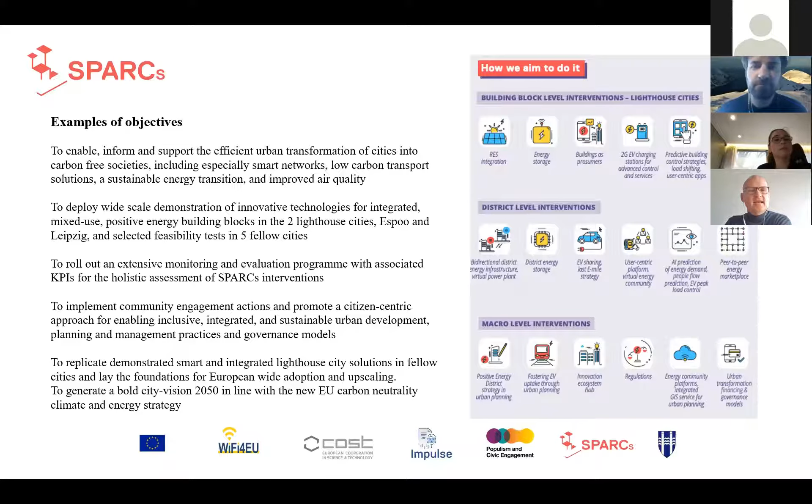As the project matures, we are in the second year now, and we will be looking at the uptake of different solutions that have been trialed in the two lighthouse cities. So it really is about the fellow cities scaling up some of these things and trialing them in different contexts.

The COST project is about synthesizing and improving existing knowledge from local, regional, national and international settings, and really understanding how we can better utilize and develop welfare technologies to assist those that need it, primarily to stay at home and enable them to access services more efficiently, and to be more self-sufficient. It's a very interesting project.

It's still in the early days. It started around 6 months ago, and we're very much looking forward to developing some grant applications on the back of this. As you probably know, these cost actions are about developing a consortium and partnerships, really to develop good ideas that can then be developed into grants and research and innovation.

Finally, our Impulse project, there we are looking at the application of and the challenges associated with AI and blockchains, and we are doing this in the context of developing new EID or authentication solutions. We are going to bolt this onto the Better Reykjavik platform, and the way we're going to do it is that we will develop it in such a way that it will enable disabled people to authenticate more easily onto our democracy platform, probably and primarily through face recognition technology.

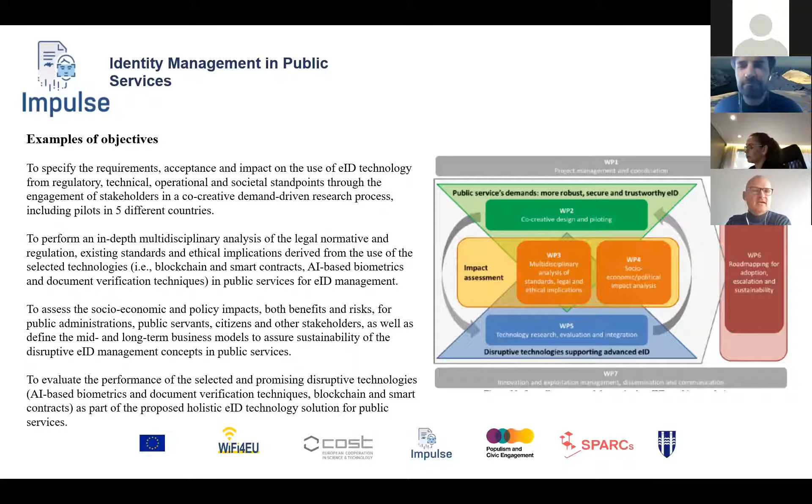And of course, because AI and blockchains are universal technologies, it's very hard to say how they will develop or what they will produce. It's very important that we understand better what the implementation of these technologies means for the public sector in terms of risks and other things as well. So we're looking forward to that. It's still very early days in this project.

Policy alignment is very important to us. When you come to us with a proposal for a project, it's important that we are able to align your project and what it will produce to what we want to see happening through our implementation in policy. And of course, the overarching agenda is Reykjavik's commitment to become climate neutral by 2040, and Reykjavik's new green plan as the catalyst for this.

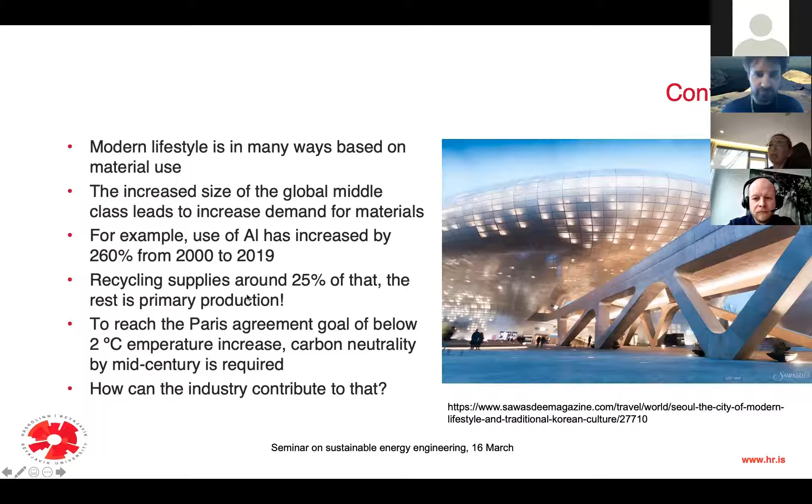And we know that if we are to reach the Paris Agreement goals of below 2 degrees or even 1.5 degree temperature increase, carbon neutrality by mid-century is required. And how can the industry contribute to that?

If we look at the sources of greenhouse gas emissions globally, energy, as in electricity, heat, and transport, is around 50%. Shifting to green energy such as renewables has been a big focus of research efforts pushing towards decarbonizing energy production.

Then we have agriculture, buildings, and a contribution of more than 20% directly from industrial processes, such as steel production and cement production, but also aluminium production and fertilizer production. Here we are talking about direct emissions. The energy needed to run these processes is not included in this slice of the cake, which is 21%. It's included in the blue cake instead.

People are working on this, but there are still not many solutions that have reached industrial scale to reduce those industry emissions.

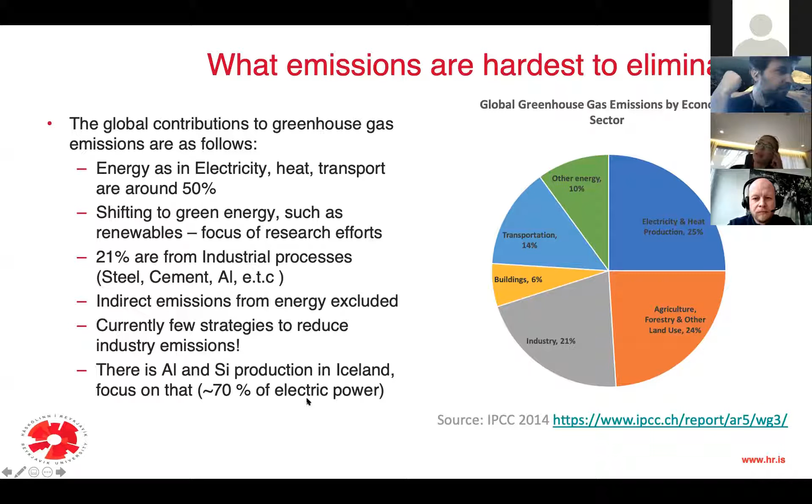In our work, we have been focusing on aluminium and silicon production because those processes are operated in Iceland, and they actually consume about 70% of the electric power produced in the country today.

Metals, as we know, are always oxidized in nature. We cannot find them in metallic form. The only exception would be maybe gold and iron from meteor cores, but in general you will not find them in the metallic shape. They are oxides, sometimes sulfides, and we need to remove the element bound to the metallic atom in order to get the metal we can use for different products.

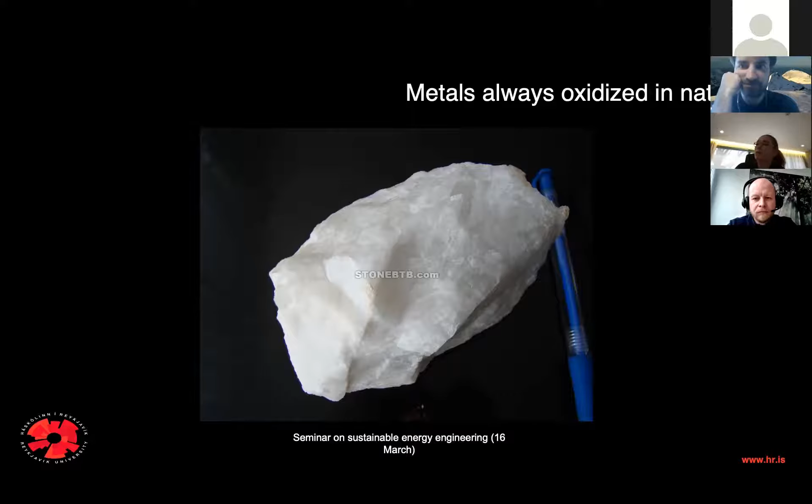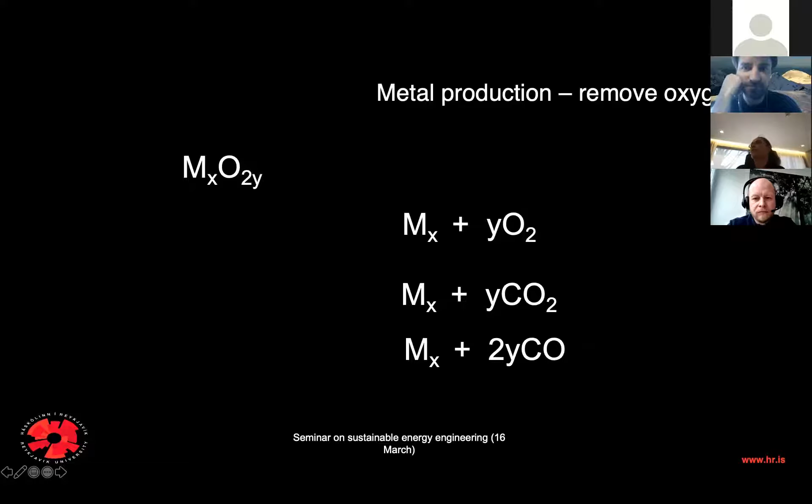So we find the metallic oxide as an ore, typically, and we need to separate the oxygen from the metal. Ideally we could separate it in the form of oxygen, but in reality we often have to go through a process that releases the oxygen in the form of CO2 or carbon monoxide, due to the nature of the chemical processes used.

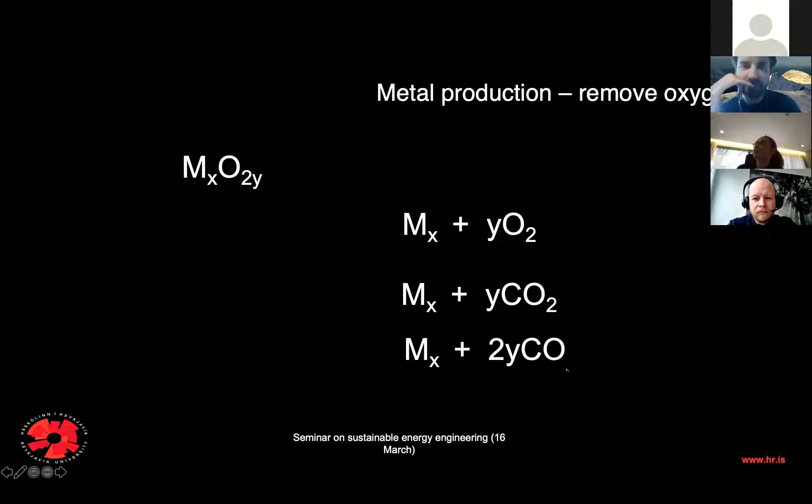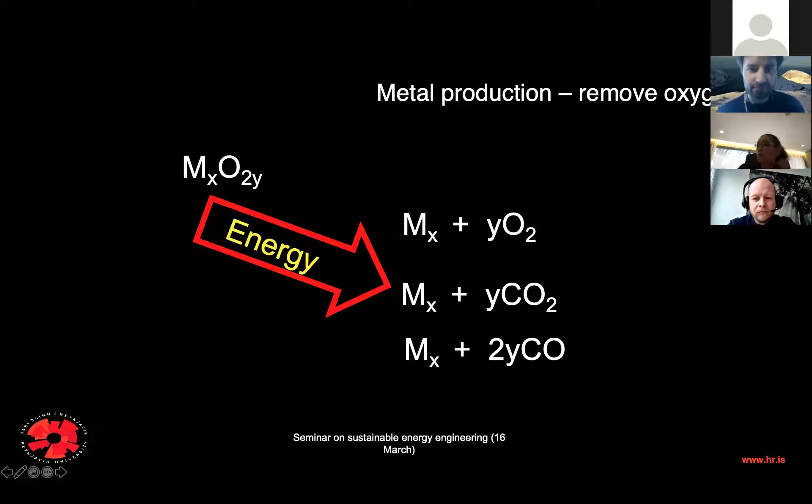In addition, we need a lot of energy because being an oxide is a much lower energy state for the metallic atom to be in. So we need to add this energy, often in the form of electricity, and then remove the oxygen, which often occurs in the form of CO2. Then we have the metal we can use for different things.

Aluminium electrolysis occurs in big electrolysis cells. You have the raw material in the form of Al2O3, aluminium oxide, and anodes sticking into the electrolysis cell. You pass DC current through, the aluminium is reduced to metal, which accumulates at the bottom of the cell, and the oxygen combines with the carbon anodes and is released as CO2.

One of the solutions we and other people are working on is replacing these carbon anodes with inert anodes so that we could release oxygen rather than CO2.

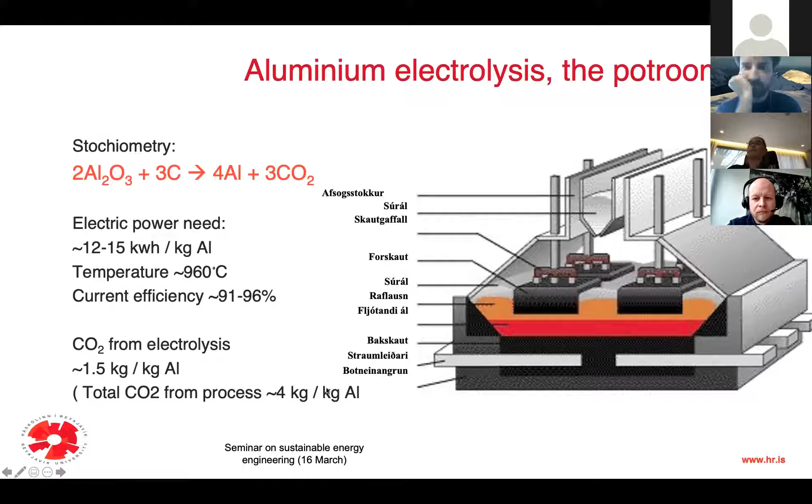CO2 emissions from the electrolysis process itself are around 1.5 kilograms of CO2 per kilogram of aluminium, but in total from the process it's around 4 kilograms of CO2 per kilogram of aluminium when we include production of the alumina raw materials and the anodes. And then, of course, we have casting and transport also to take into account.

But as a matter of fact, since we are using so much electric energy in this electrolysis process, the indirect emissions from producing that electric power are the biggest contributor to the carbon footprint. So if we are producing aluminium with hydropower, for example, the total emissions would be around 4 kilograms of CO2, including all the different processes leading up to the electrolysis step.

If it's produced with natural gas, the footprint is close to 12 kilograms of CO2 per kilogram of aluminium. But if we are using coal thermal power, we are at around 18, even up to 20 kilograms of CO2 per kilogram of aluminium. So basically, it's the energy component that dominates if we don't have renewable power.

We see that production has more than doubled since the year 2000. Most of that increase in production has happened in China, where they are using 90% coal-based power for aluminium production.

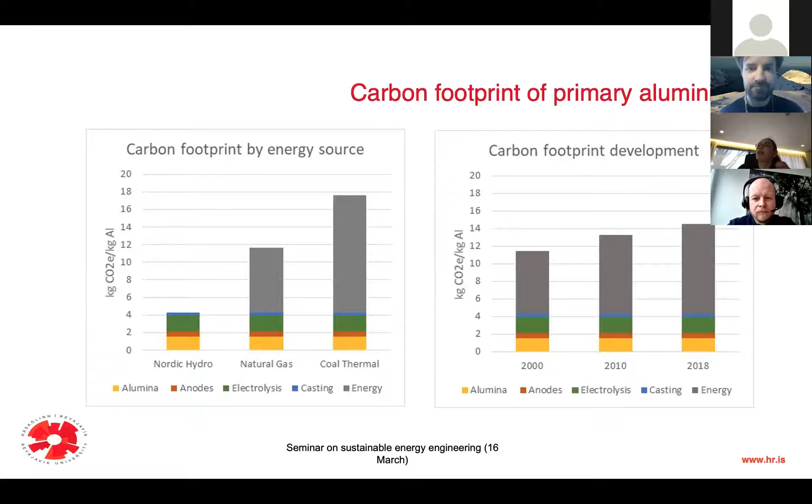We are producing so much aluminium here per capita that this is actually a big part of the CO2 emissions that occur in Iceland, even though it's part of the ETS system and isn't the direct responsibility of the Icelandic government. It is still something that we need to focus on.

So how can we reduce the emissions? To attack the electrolysis-related emissions, the alternatives are either capturing the CO2 from the flue gases that come from those cells and doing something with those emissions, for example pumping them into the ground using the CarbFix process to turn them into minerals, or we can go for inert anodes.

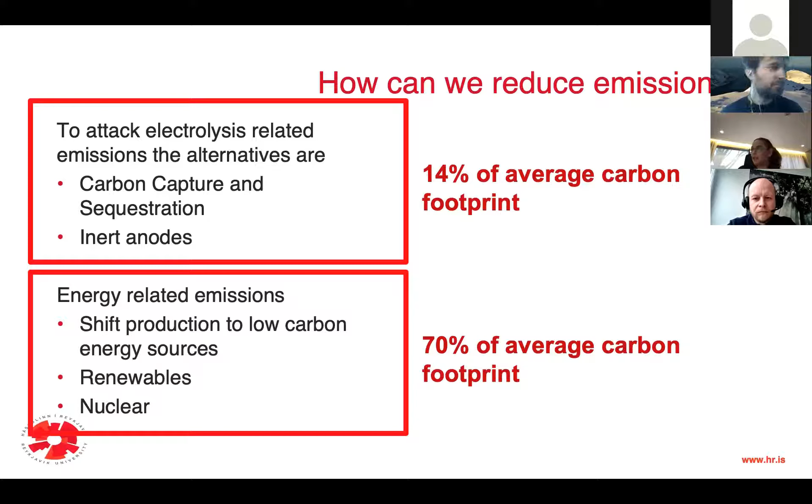Globally, the most important part is to shift production to low carbon energy resources. Now this is only 14% of the average carbon footprint, and this is 70% of the average carbon footprint. But still, this is what happens within our boundaries, within our borders, where we have some control over the emissions. So it makes sense to do research in that field in Iceland.

If you look at silicon production, it is not an electrochemical process. It's not electrolysis, it's a carbothermic process. Basically you put the raw materials, which is quartz or silicon dioxide and carbon, into the furnace, and then you heat up the insides of the furnace with electric current, partly through an electric arc, heat it up to 2000 degrees centigrade. This is the minimum here in the lower parts of the furnace.

We need to get silicon metal out of the furnace. The CO2 emissions from this production is around 4.7 kilograms of CO2 per kilogram of silicon, mostly due to the stoichiometry here of the reactions that happen.

So basically, we increase the temperature high enough so that it is more energetically feasible for the oxygen to combine with carbon and leave the silicon behind to form a metallic phase. That's the definition of a carbothermic process. It just happens spontaneously at high enough temperature.

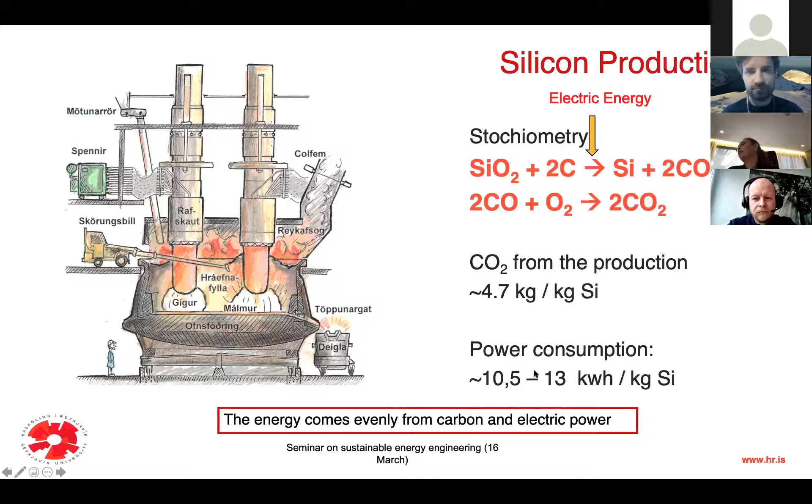And the power consumption here is a little bit lower than for aluminium, but still considerable. In the case of silicon, as in the case for aluminium, the production volume globally has increased by more than double since 2000. 240% is the production volume today as compared to the year 2000. And as in the case for aluminum, most of this has happened in China, the production increase has occurred there mostly.

As a result of this, the average carbon footprint of the silicon has been increasing, but not as dramatically as for aluminium. The reason is that a significant part of the silicon production in China is on hydropower, almost half of all the energy that goes into the silicon production process. And that is probably because the silicon smelters are smaller units, they can be paired with a reasonably sized hydropower plant.

And also, if you cannot run the hydropower plant always, and sometimes you need to cut power, the silicon smelter can live with that without damaging the equipment too much. But anyways, since the year 2000, the average carbon footprint from this process has increased around 1.5 ton CO2 per ton of silicon. So there, now about half of the total carbon footprint is the energy production.

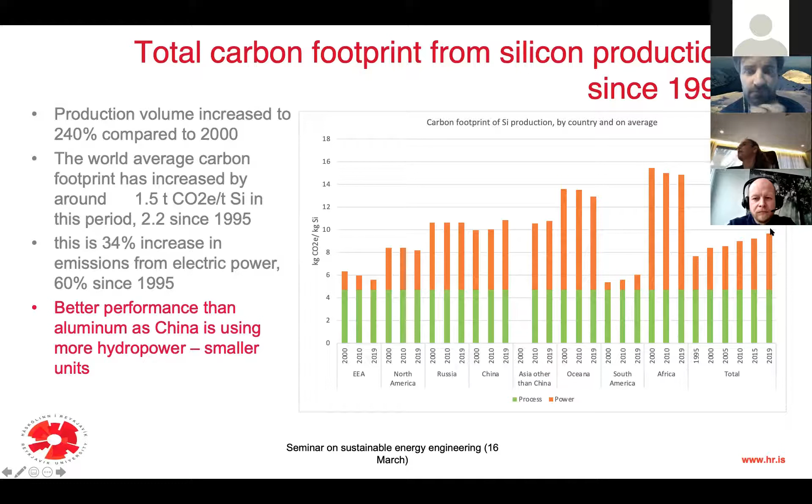So how can we reduce the emissions from silicon production? We can use biocarbon reductants, so replace coal with biocarbon, charcoal. We can use carbon capture and sequestration.

Actually, it is more feasible for silicon than for aluminium because the concentration of CO2 is larger in the flue gases, it's around 4%. So we can use off-the-shelf technology to actually up-concentrate CO2 for further processing. And then we can dramatically change the process, use methane as a reductant or maybe electrolysis.

And then we have the energy-related emissions. Currently, even though we have a significant amount of renewables used in the silicon production process, still half of the CO2 or the carbon footprint comes from the energy production. So shifting to low carbon energy sources is important, be they renewable or nuclear. So this is about the ratios in the carbon footprint.

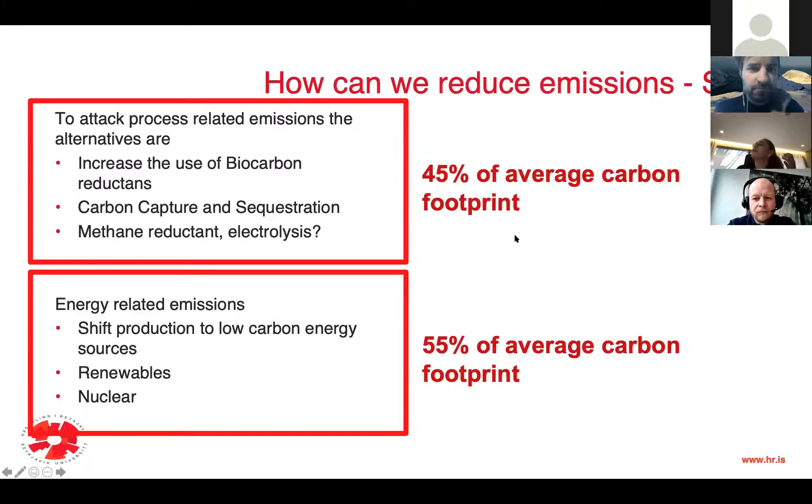Now, carbon capture and sequestration. I saw that at least Marta Rose was in the audience from Reykjavik Energy.

Reykjavik Energy, along with researchers from the University of Iceland, have developed a method to turn CO2 into minerals. They demonstrated this at a geothermal power plant by taking the non-condensable gases, CO2 and H2S, dissolving them in water, and pumping it down to a depth deep enough for the pressure to keep the gases dissolved. There they react with minerals in the basaltic rock underground and form carbonates, turning into rock. This is permanent sequestering of the CO2.

It's basically out of the way permanently, and very unlikely to get out of this form. I think most Icelanders are quite proud of this initiative. But this will not only work for CO2 from geothermal power plants, it's a great opportunity for industry.

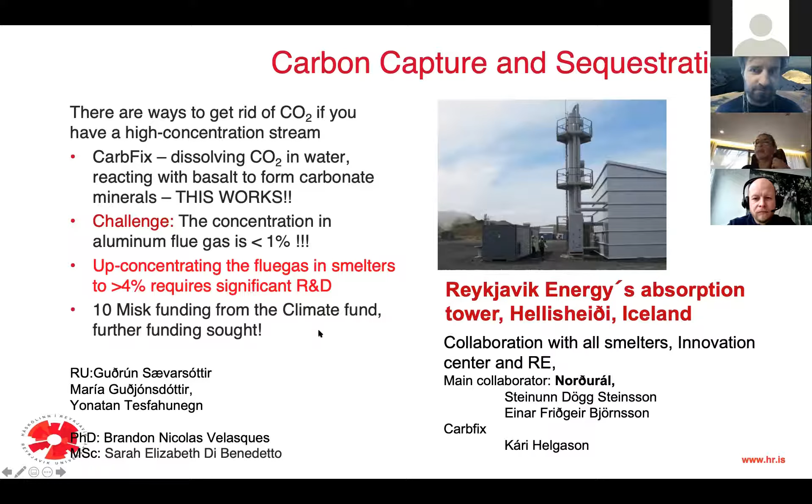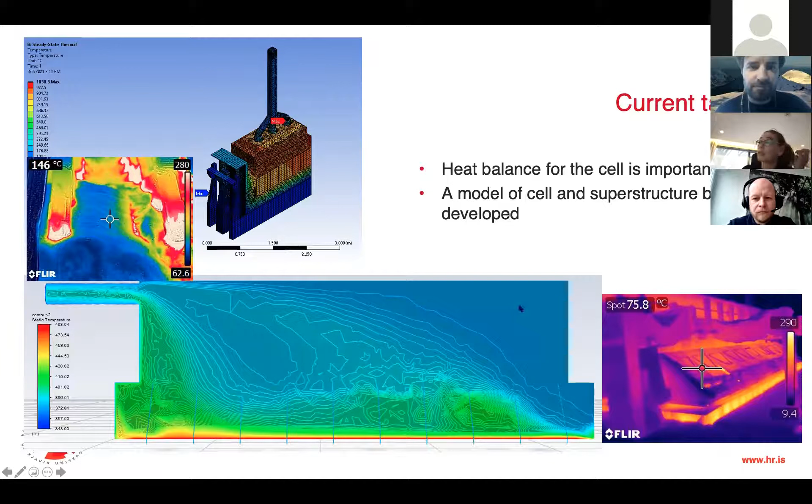We currently have a master's student and a PhD student working on thermal modeling of the cell and the superstructure, so that we can estimate which changes have to be made to the cell operation and superstructure design in order for it to cope with a reduced flow rate, by 75%, from the cell.

Then there is the initiative of inert anodes for aluminium production. There we replace the carbon anodes with inert anodes, so that we would be producing oxygen directly. This has been the holy grail of this industry for decades, or 100 years I would say, but has not been successful. Recently there has been a breakthrough with a modified electrolyte, which allows a lower temperature, reducing the chemical erosion of the electrolyte on the anodes.

Okay, sorry about that. That was my dog helping me with the presentation.

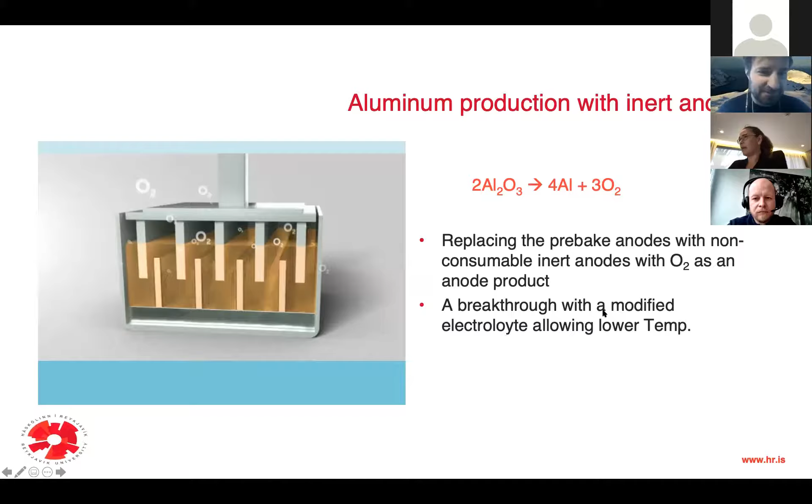So a modified electrolyte has made this seem more doable, and there are several development initiatives ongoing. The best known one is the ELYSIS process, where Rio Tinto, Alcoa, Apple, and the Canadian government are leading an initiative in Canada.

Rusal also has a project ongoing focusing on this, and we have an Icelandic project, the Arctus project, where the Innovation Center has been leading the R&D work, with Reykjavik University also participating, and students working on this. Now we have funding from the Alcoa Foundation and the Icelandic Research Fund, focusing on some fundamental mechanisms for this inert anode project. We have a postdoc and a PhD student working on this.

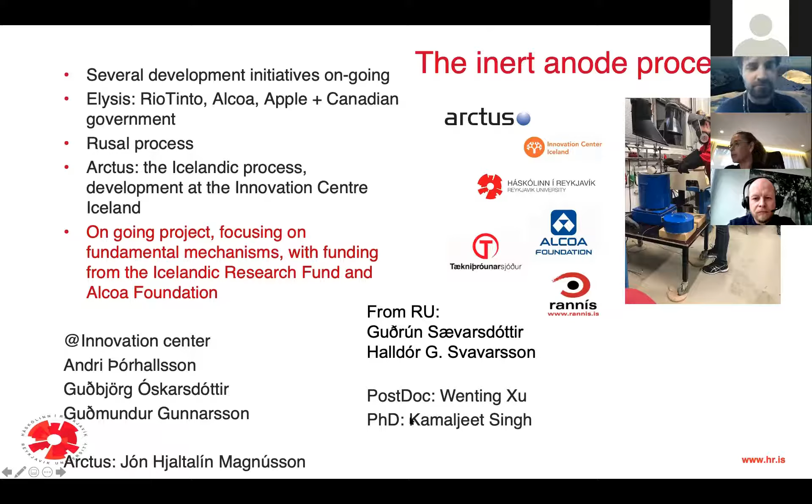So thank you for your attention, and if there are any questions I would be happy to answer. I could also have talked about geothermal energy, but that was for another time.

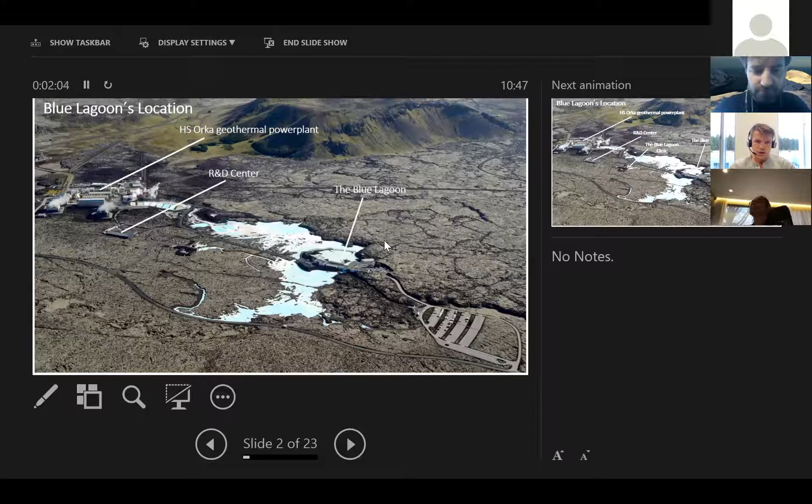The R&D center is very close to the power plant, and the Blue Lagoon itself, this spa, is in this circle here. Since recently, there have also been erected 5-star hotels close to this, and in addition there is this Blue Lagoon clinic where people can get treatment for psoriasis.

This is a schematic presentation of the origin of the water. The boreholes are about 2 kilometers long, and at that depth we have a temperature of about 240 degrees. The seawater percolating through the porous lava gets mixed with fresh meteoric water, and this gives a mixture of 70% seawater and 30% freshwater.

This is referred to as geothermal seawater, and it is actually used - the steam from this mixture is used for electrical production. The liquid remaining is used with a heat exchanger to produce hot water for district heating. So there are both thermal and electrical power.

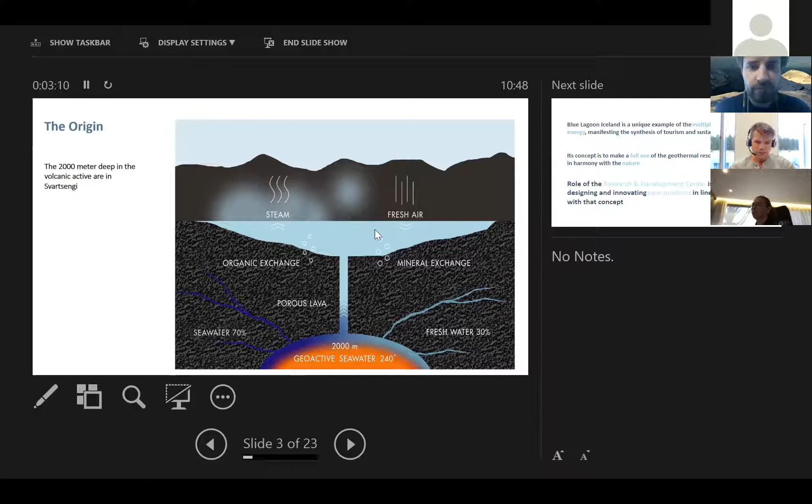Now the Blue Lagoon, due to its origin, has the concept of fully utilizing all the resources coming from this geothermal origin - make full use of geothermal resources in harmony with nature. That's the concept. And the R&D center has the role of finding new products and trying to get more and more full use of all the resources.

For the case of a historic region, the Blue Lagoon was selected 9 years ago by National Geographic as one of the 25 wonders of the world. And that is due to the nature of the water.

This healing power was discovered early in the history of the Blue Lagoon. People started bathing in this, and they found out that this mixture of silica and salt, and also later algae that was found in the environment, created a very healthy liquid for the skin. That was the origin of the Blue Lagoon. It was meant as a clinical treatment to start with, and that was roughly 20, closer to 30 years ago, I think.

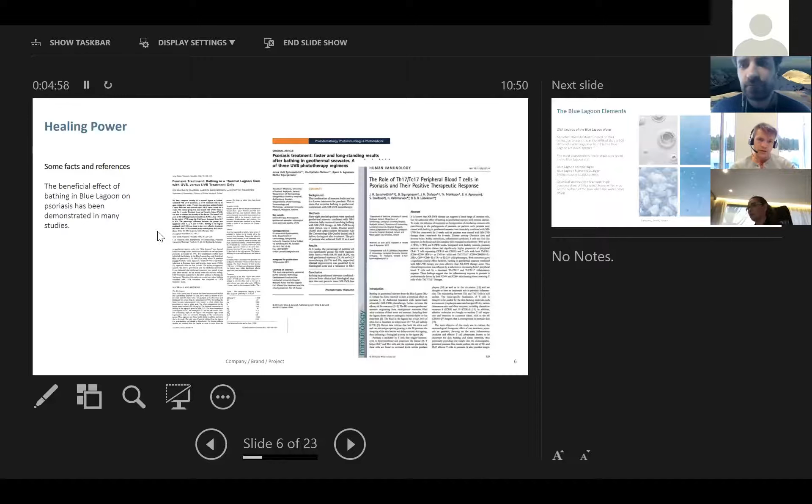The main elements that we are using in the Blue Lagoon is the silica that gets dissolved from the bedrock due to this high temperature, and then we have this salt, this mineral coming from the seawater. This is getting mixed with algae that thrives in the nature of the nearby lava. This all creates a unique mixture, and this has been the origin of a large skincare production of the Blue Lagoon.

It has been clinically proven and published in many papers that this has a beneficial effect for the skin, and it has also been patented. The use of this silica found in the lava and seawater, and also the use of the algae, has been patented. That was about 15 and 10 years ago.

This effect on skin has been proven in many clinical studies, and here we have examples of papers published on that. Actually, these clinical studies have not been in my area. I have been more focused on the silica itself and the algae and the chemical use of the algae.

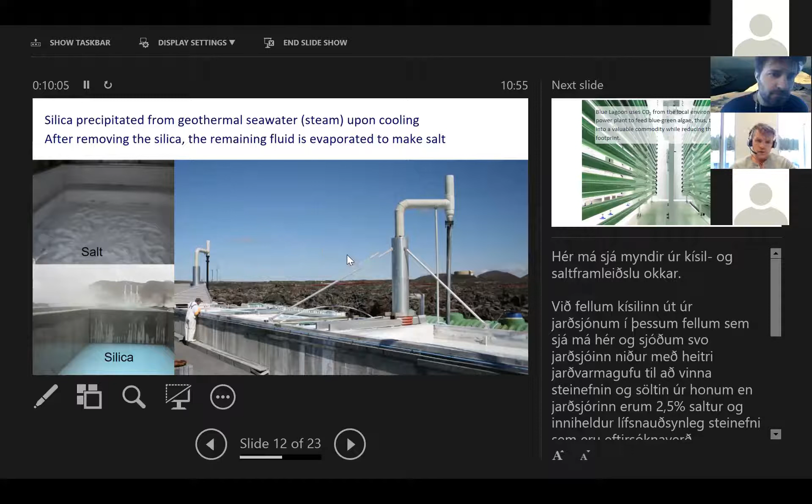Here we have a photograph of the photobioreactor. So we are pumping this saline water, this geothermal brine, and this algae—an organism that was isolated from the area of the Blue Lagoon, so it has adapted to this environment.

It is thermophilic, it needs about 40 degrees to grow, and we use artificial lighting, LED diodes, powered by green power from the geothermal power plant. This carbon dioxide emission is pumped into this photobioreactor, and that is more or less all we need.

We get some nitrogen and a little bit of phosphorus. Actually, we need more than this—we need to add some nitrogen and phosphorus nutrient, but we are working on extracting this nutrient from lava powder. That is one of the projects we are now working on.

I might mention that we have been developing methods to extract blue colorant from this algae. This algae is actually blue-green algae, so-called, meaning it contains both blue pigment, an organic protein, and chlorophyll, a green part. By using this geothermal silica, we can extract the powder from a ruptured cell, and this gives a beautiful blue color. We are hoping to use this blue colorant later on in some of the Blue Lagoon products.

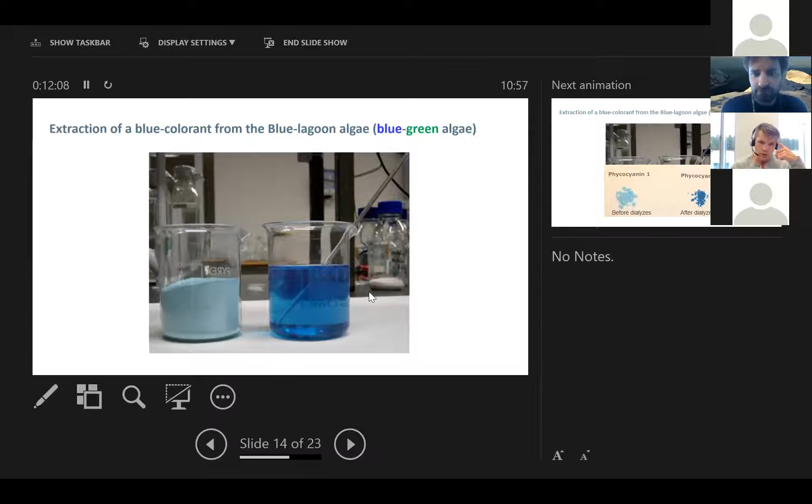Here we have just a pure powder. It has been freeze-dried and dialyzed, and before dialyzing we have a lot of salt as well. Hopefully we can add this to some soft drinks or even these cosmetic products, because it has also been shown that it improves the skin's barrier, and it's also antioxidant, so it can be taken as a nutrient as well.

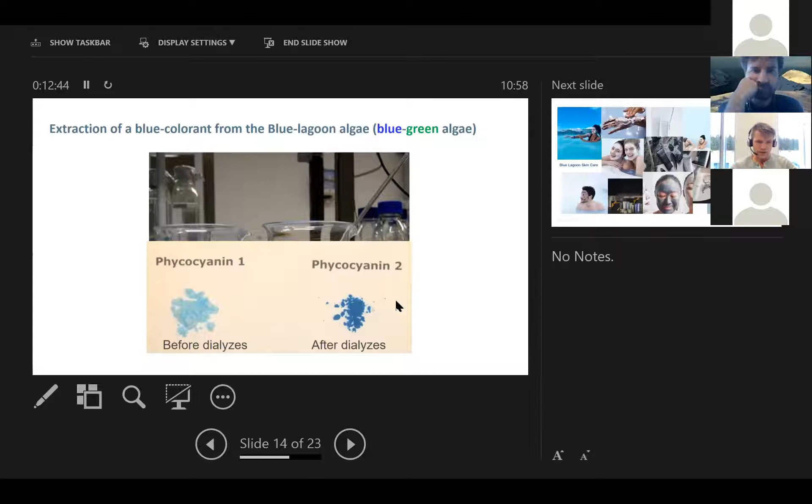So just to summarize the full circle, we get this water, we get this pond, this Blue Lagoon, and those of you who have been there may recognize the white powder on the bottom of the Blue Lagoon, which is precipitated silica. It is very popular to smear it on your face and skin.

Then we have these cosmetic products, we have this salt, and also, not mentioned here, we are using powdered lava mixed with this silica to give more scrubbing effect. This is also being produced.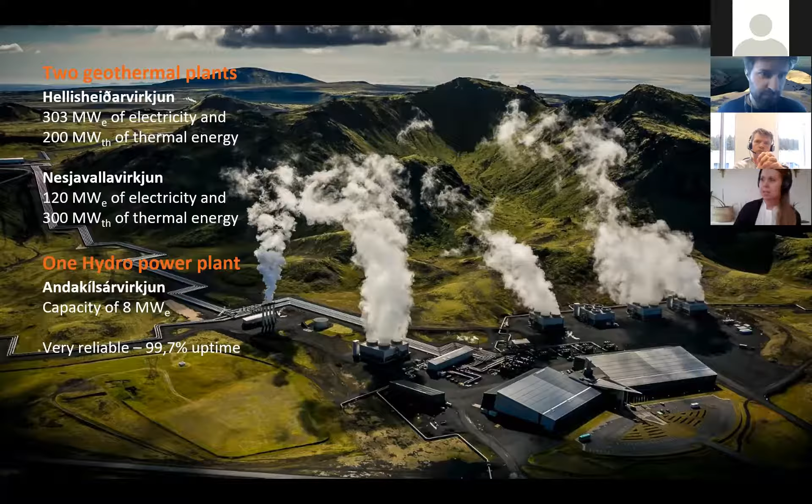The examples I want to give you today are from different origins. I want to talk a little bit about the geothermal park, which is a similar concept to what HS Orka is working with, an industrial symbiosis combining the value streams of geothermal energy with other industrial processes. We also have a small test facility at our power plant considered for R&D. I'm going to talk about the Carbfix abatement of geothermal gases in operation at Hellisheiði power plant, and then some projects on decarbonizing the transport sector.

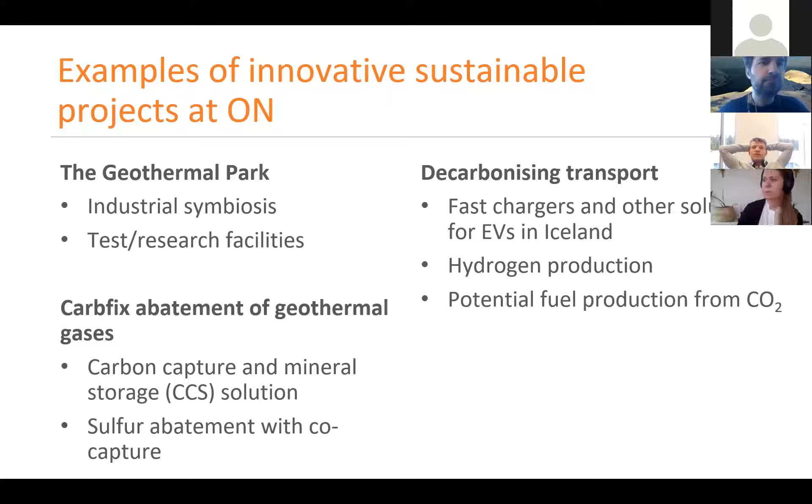If we start with the geothermal park, it is this industrial symbiosis concept and circular economy concept that we are working with. This is a simplified schematic of the Hellisheiði plant. If we look at our resource, we get a mixture of steam, water, and geothermal gases from our production wells at Hellisheiði. This mixture is fed from the resource up to the surface via our boreholes, and then towards the power plant, where it's divided into the steam and gas phase that drives the electrical turbines for production of electricity.

We get an accumulation of non-condensable gases that we have to release from the energy production circle and dispose of. The hot water coming from the wells is used for hot water production. The schematic is actually a little bit more complicated than this - we're operating in 2 pressure stages at Hellisheiði, maximizing the electrical capacity of the plant by producing more steam from the fluid. But in its simplest form, this is how we do it.

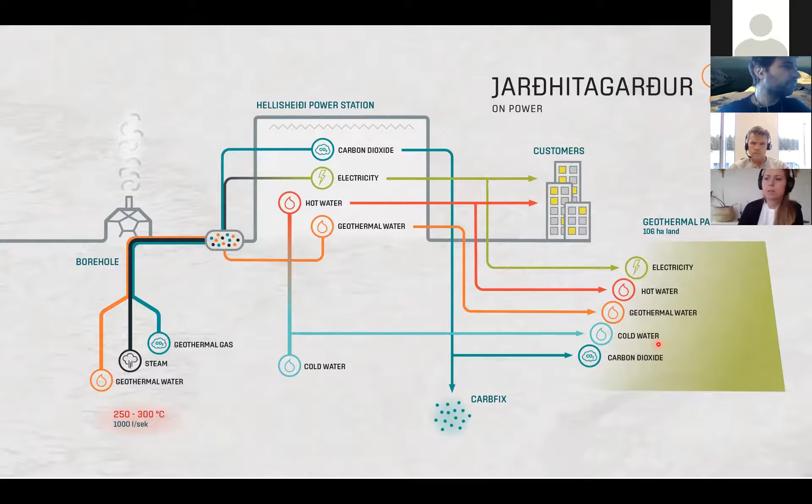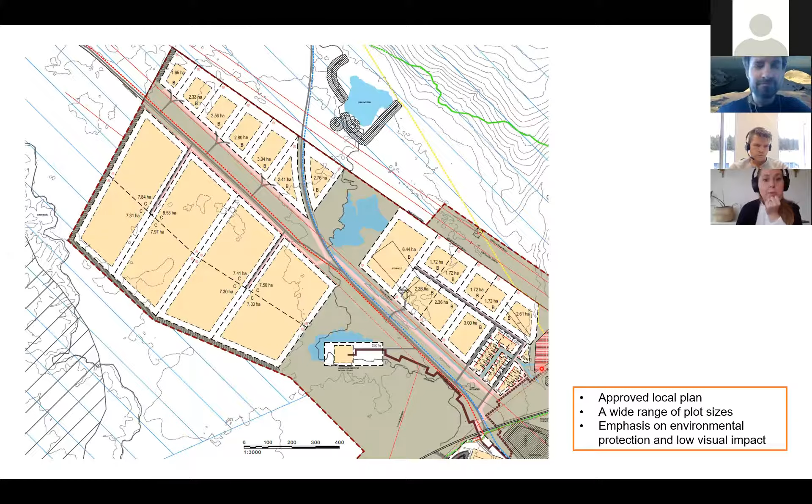We have restraints. We cannot offer anyone who wants to join us to be a part of the geothermal park, because we are located in beautiful scenery, delicate nature, and close to protected groundwater streams. So there's no tolerance for polluting industries in this area. We have to be really innovative and careful in which partners we associate with, and that gives us a fairly tight frame of cooperating partners that we want to welcome to our site.

The Vaxa company, formerly Algaennovation, is an algae producer, producing microalgae mainly for fish feeds. But they want to develop into other businesses or areas as well as they grow. They use electricity as a light source for the algae production, some amount of fresh water that we can supply at the geothermal park, and waste heat from the geothermal plant as a heat source. We hope to be able to supply them with carbon dioxide, as Halldor was discussing in his lecture before.

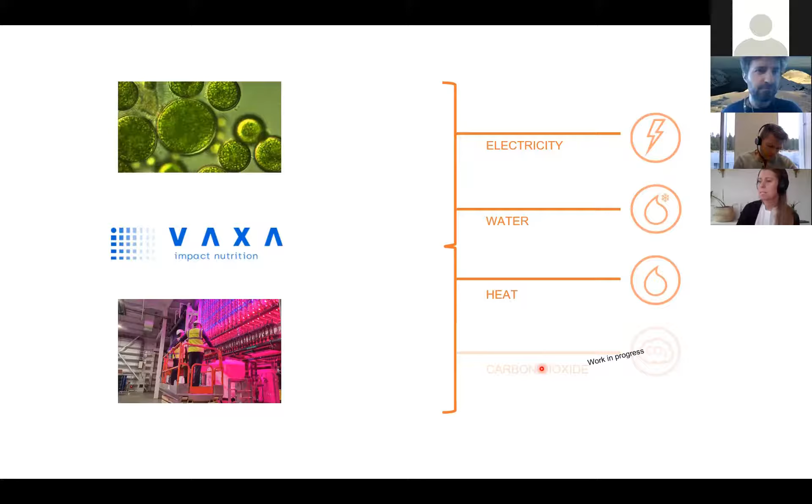Climeworks is another company that we're very proud of having in our geothermal park. It's capturing CO2 directly from air, capturing excessive CO2 from the atmosphere with large fans, and they have membrane technology to isolate the CO2 from atmospheric levels. Then they're coupled with the Carbfix method to mix the CO2 with water and re-inject it into the basaltic rock at this Hellisheiði site.

So this is a cooperation between Climeworks, Carbfix, and ON Power. They use electricity, cold water, and also effluent heat, geothermal water from our power plant, and the Carbfix technology.

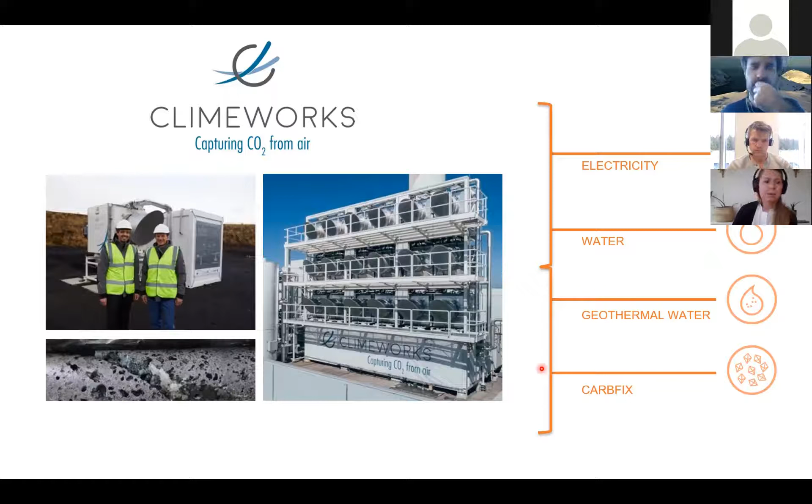We also have ambitions for the geothermal park to be an area of cooperation with developed technologies that are able to come build their structures and production plants, and are paying customers for these resources. But we have test facilities as well for partners to come and test out their production in cooperation with us, and especially to test if they can use our effluent streams in terms of gases, steam, cold water, hot water at different temperatures, and so on.

So here you see a dedicated space close to Hellisheiði, on the Hellisheiði industrial site, where we have room for containers to come in and plug up with our effluent streams, electricity also, and hot water and cold water, to test out new technologies. Hopefully they will then grow to be a customer at the geothermal park when they have developed their production to full scale.

An example of what is now being built at the technical park is what we call the burn and scrub station, where we are trying to purify CO2 from the geothermal condensate gas, and see if we can come up with a product that can be used, for example, for algae production or other uses of CO2. So this is just in design stage.

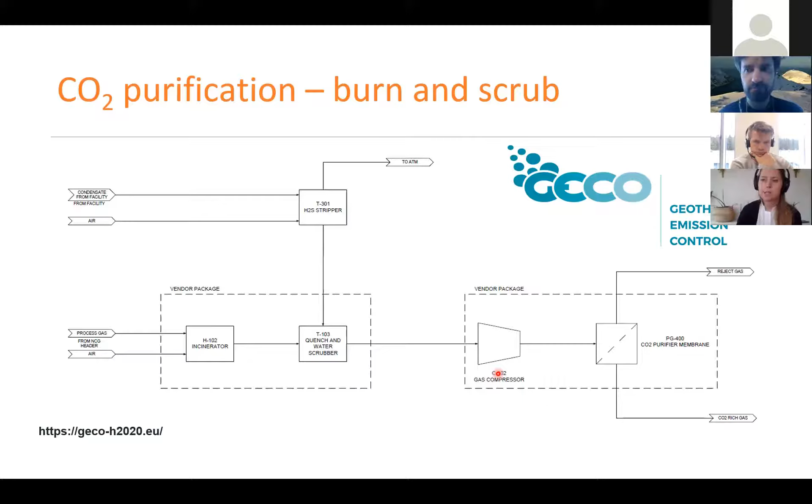It's part of the GECO project, which is a Horizon 2020 funded project, a very large project with different work packages, and this is one of them. We hope to get this plant up and running next summer, so this is in the final design stage. The main challenge is to purify the H2S from the CO2 stream, and some nitrogen as well.

Our biggest question mark today is how can we utilize geothermal fluid, which is an effluent from our power production, at 50 to 60 degrees. We have quite enough of this stream at our locations, and few customers who can use it, so we are hoping to find partners that can utilize this stream. It's geothermal water, it has some silica content and some dissolved gases as well. So it's not clean water, but it is a valuable stream, and our perfect match would be someone who could use this and lower the temperature before it's re-injected back into the reservoir.

The Carbfix methodology is utilized today at the Hellisheiði plant. We have managed to decrease our carbon footprint by 30% since 2014 by utilizing this method, and more importantly, to reduce the H2S emissions, because this is the characteristic geothermal gas you can smell in Iceland with this sulfur rotten egg smell, and we wanted to decrease that pollution from our operations.

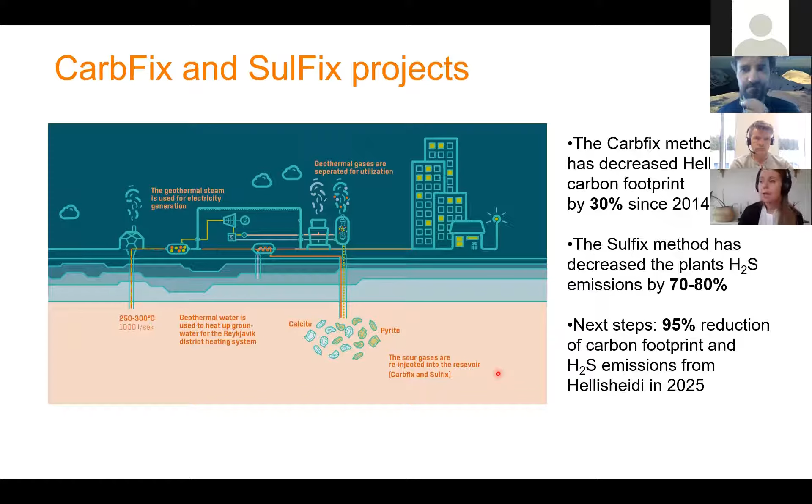So the Sulfix method is similar to the Carbfix method. It's basically a co-capture of H2S using the same process as Carbfix. It dissolves the H2S into water and is re-injected into the basaltic rock, where it forms pyrites within the bedrock. We have managed to decrease our emissions by 70 to 80% annually, which has been a huge success for us. So the next step is to increase the CO2 mineralization in our power plant. We aim to have a 95% reduction of both those gases by 2025 for the Hellisheiði plant and 2030 for the Nesjavellir plant.

One of our focus areas is decarbonizing the transport sector. ON has been a pioneer in providing fast charging stations around Iceland to elevate and enhance the transition from fossil fuels to electricity for EVs. This is an ongoing project since 2014, and we're constantly improving our network with new stations, upgrading the old ones, and adding new locations as well.

Maybe that's not so much an innovative project, more a commercial one, but hydrogen production is one of our innovation projects. Differently from the concept of utilizing renewable energies in Europe to produce hydrogen, because of the fluctuating nature of solar and wind, you utilize excess fluctuating production to produce hydrogen. We, on the contrary, are a baseload power - geothermal produces stable baseload power all through the year.

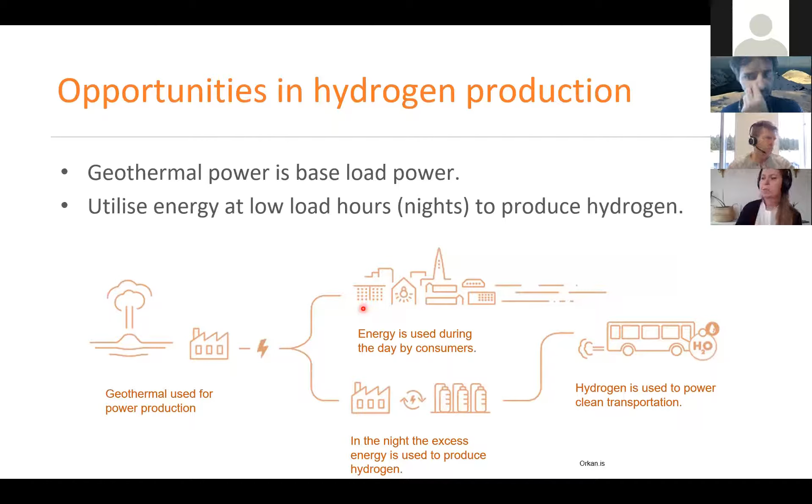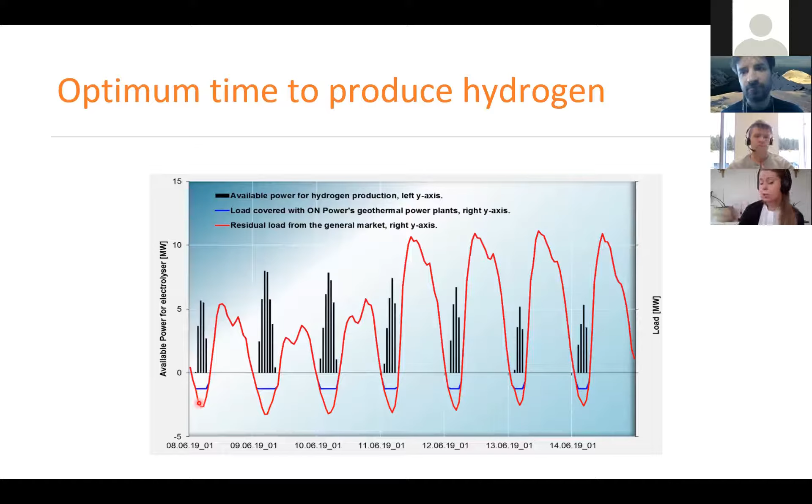So we actually have an up and running hydrogen producing plant at Hellisheiði, and it's producing hydrogen at the moment. There are very few cars in Iceland operating on hydrogen, but they have just recently been getting the supply up and running again, so these cars are up and running as well on our roads.

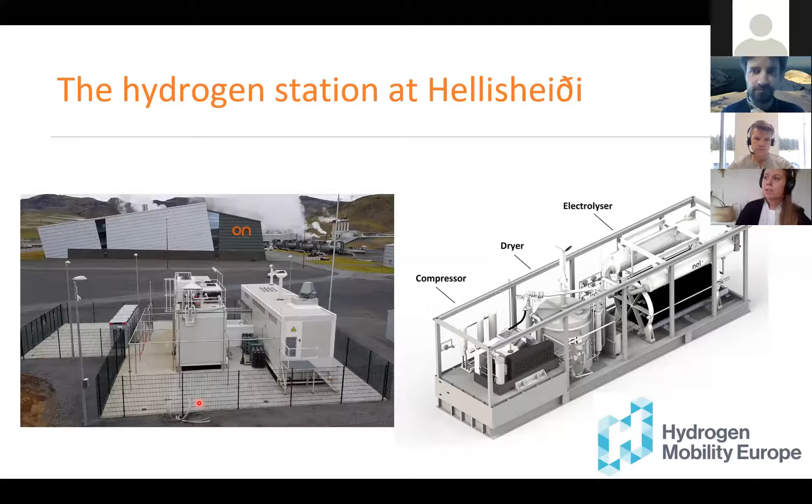And this is a part of the Hydrogen Mobility Europe project. So we are responsible for constructing and operating the hydrogen production, while we have partners who are then buying production from us and distributing it as fuel in two locations in the capital, or southwest corner of Iceland. Basically, the hydrogen station is located within the technical park, so it's one of these R&D projects situated in the test facility areas at Hellisheiði.

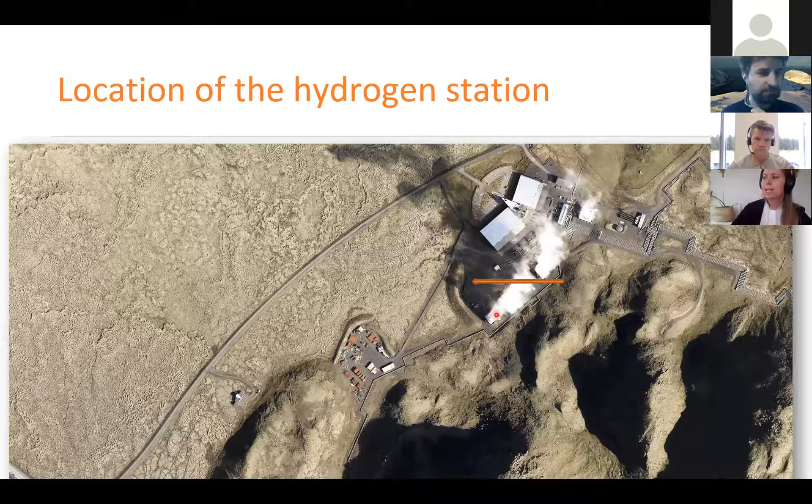We have plans for other renewable fuel production, for example methane production, as David mentioned I think last week, using geothermal CO2 and H2 to produce methane.

But the complexity of those kinds of projects is that ON aims to be carbon neutral in 2030. And with these CCU, or carbon capture and utilization, projects, it's not really clear how you account for the CO2 emissions. It's actually working as quite a hindrance in our projects and cooperation today, because both the customer who is getting the CO2 to produce some kind of fuel is expecting a zero-emitting fuel, while we are at the same time expecting to have a zero-emitting power plant. So this is quite a challenge: how to address these CCU partnerships, and who is responsible for the final emissions?

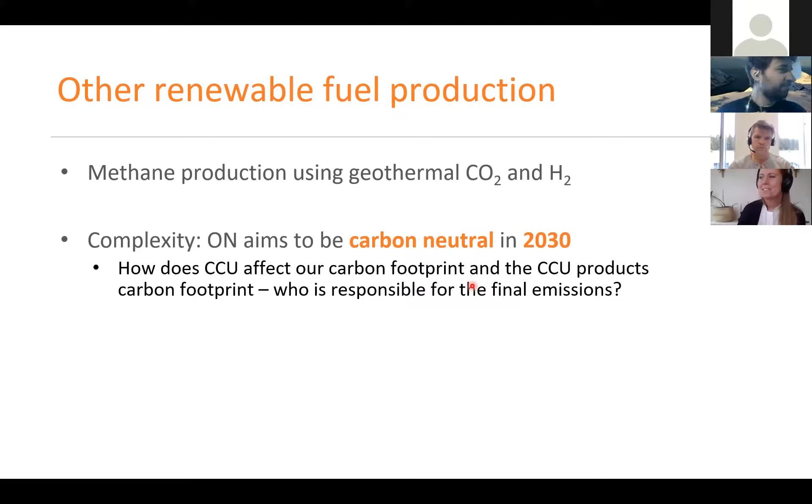I know this is an ongoing debate, and I hope to see some results of that in the near future. So thank you, and I'm hoping for some fruitful collaboration opportunities with you guys. I think there are a lot of synergies, as David has been pointing out all through these sessions, but this was to showcase our pathway and where we are able to cooperate with all of you.

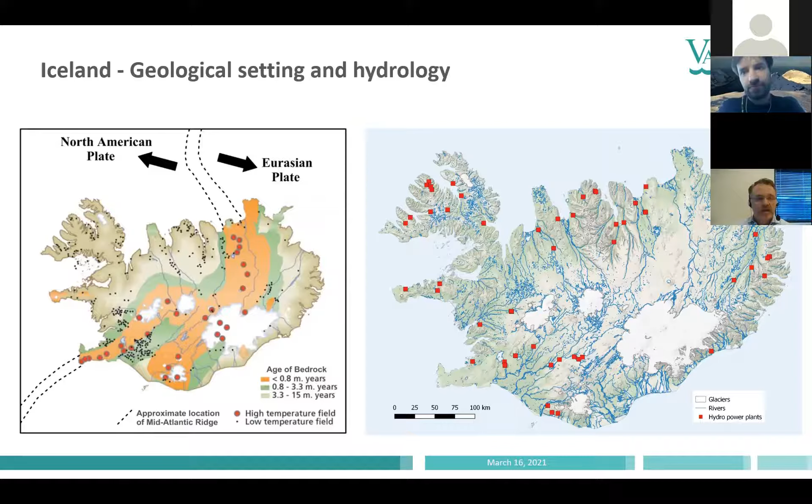In the volcanic region, we have most of the high temperature geothermal resources. Some of those have been already utilized. Currently, our geothermal utilization accounts for about 30% of the total energy production here in Iceland. Now, in this volcanic region, we also have many of the rivers, particularly those with large contributions from glacial meltwater and spring flows. Those have been utilized for hydropower development, at least many of them. Currently, hydropower utilization accounts for about 70% of the total energy production in Iceland.

Vatnaskil has participated in a wide variety of projects relating to hydropower resource development and management. We specialize in the construction of watershed scale models to provide reliable assessments of historic and near future reservoir inflows. With robust numerical modeling, Vatnaskil can simulate surface runoff processes as well as groundwater flow within watersheds utilized for hydropower production. These conditions require a physically sound modeling approach.

The models are utilized in a wide range of applications, including development of long-term reservoir inflow based on historical weather series, as well as climate change forecasts. Also, we provide shorter-term forecasting of reservoir inflow for operation and management of power plants and for flood warnings.

Services we provide also include assessment of water quality and sediment transport in reservoirs. Furthermore, we also apply and perform hydraulic design of hydropower structures such as spillways, iceways, and intake structures, as well as some related structures such as fishways.

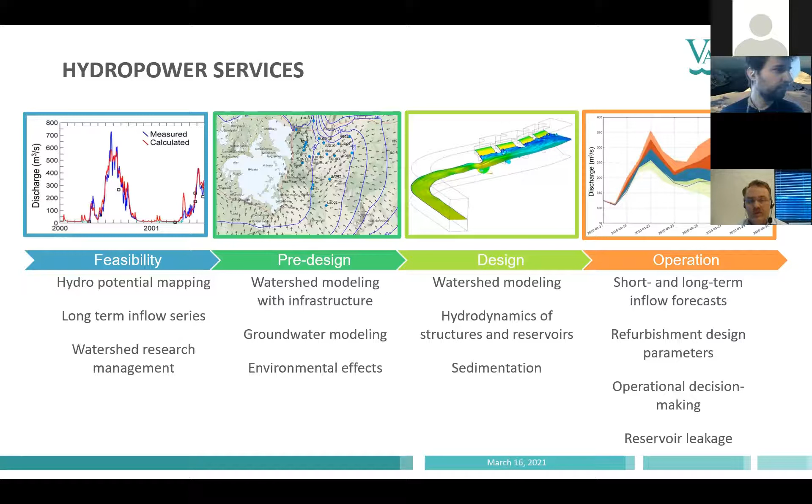Vatnaskil has participated in a wide variety of projects across the globe relating to geothermal resource development and management. This both applies to the sustainable exploitation of high and low temperature geothermal systems. Specific services provided by Vatnaskil include construction of field-wide geothermal conceptual models, well test design and analysis, resource capacity assessment, and implementation of reservoir management strategies, typically for maximizing production output and sustainability.

Vatnaskil utilizes a wide range of analytical and numerical modeling tools, including simple volumetric assessment methods, more complicated lumped parameter models, and last but not least, fully dynamic three-dimensional multi-phase reservoir models.

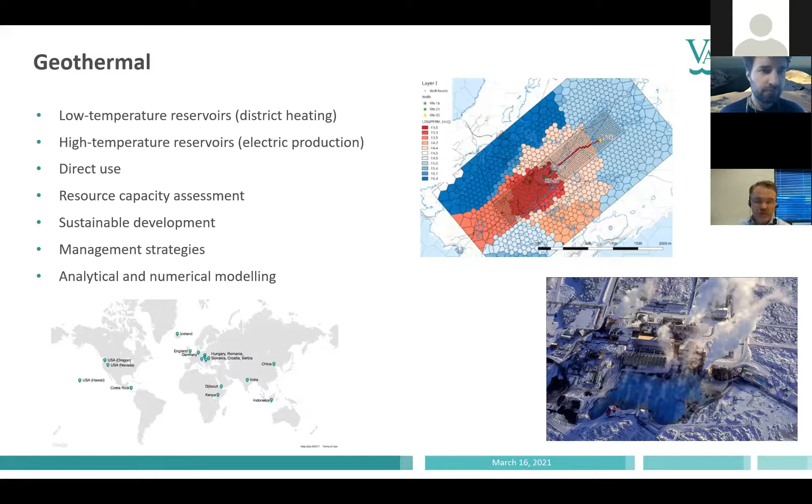Our geothermal services are tailored to the specific needs of the client for the entire project lifecycle, from feasibility studies to operational management. There can be significant overlap between the project phases in terms of the services provided. The listing here, though, gives a good indication of the work done at each stage.

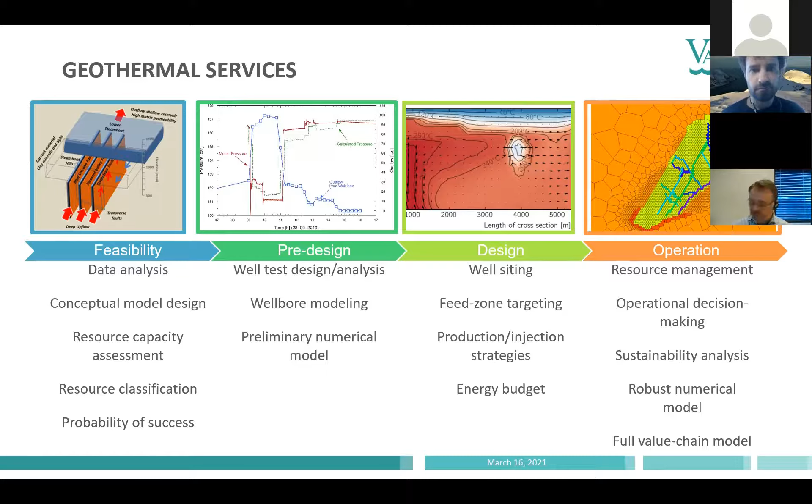I wanted to tell you a little bit more about our work on geothermal reservoirs and the modeling approaches, particularly the fully dynamic three-dimensional multi-phase reservoir models. They have proven to be instrumental in the sustainable development of geothermal systems. They give a good account for the geothermal exploitation and evaluation of re-injection and borehole renewal.

The models improve our understanding of geothermal system characteristics. We can assess how they can be sustainably developed as measured data accumulates on operational parameters and reservoir responses. This allows for robust operational decisions, ensuring continued sustainable exploitation.

On the left, we can see how geological strata is represented in a reservoir model, with inclined geothermal wells crossing the multiple layers of rock and sedimentary material. At right, however, we have some modeling results assembled. In particular, we're looking at a hot convective reservoir underlying the insulating cap rock in gray color, and we have flow arrows indicated and the significant cooling of the rock outside the main reservoir.

Exploiting geothermal reservoirs can have some impacts on the environment. It is, of course, important to ensure minimal impacts as we plan for the sustainable development of the resource itself.

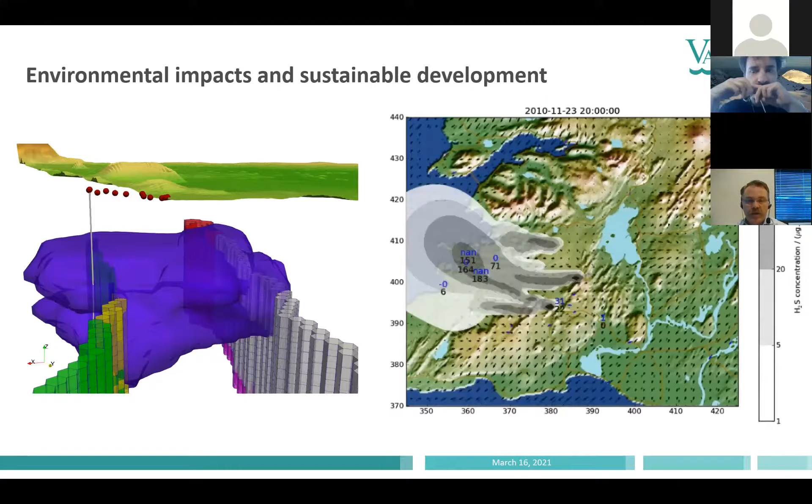The comparison of simulations to the measured values is very good, and this kind of modeling allows for design and evaluation of mitigating measures to fulfill regulation requirements.

Our modeling and analysis on district heating networks, combined with our experience in sustainable resource utilization, forms a basis for our sustainable district energy services. Services span across the lifetime of a district energy system, from initial resource assessment to development strategies, operational management, and numerical forecasting.

The integration of numerical models, which specifically address resource management and operation of district networks, can be used to streamline a variety of operational processes and management decisions, including sustainable resource utilization, investment planning, and general optimization of operation.

This approach allows for the sustainable development of distribution networks with refurbishments and expansion, focusing on sustainability, deliverability, lifetime of investments, and profits.

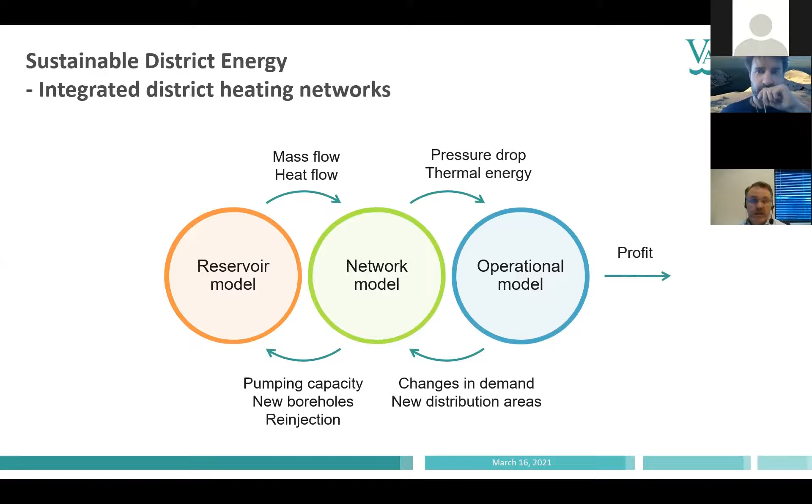Vatnaskil has developed a more general approach to utilize multiple resource streams. Overall, we want to be able to integrate multiple energy resources and have a diversified energy utilization. This includes utilizing waste heat and all other potential resources that may serve downstream users. It is, however, important to optimize the resource utilization for efficiency and cost effectiveness.

Modeling these systems, furthermore, allows for various analysis, including exergy analysis. This may, for instance, help in planning suitable contributors and users to the overall system.

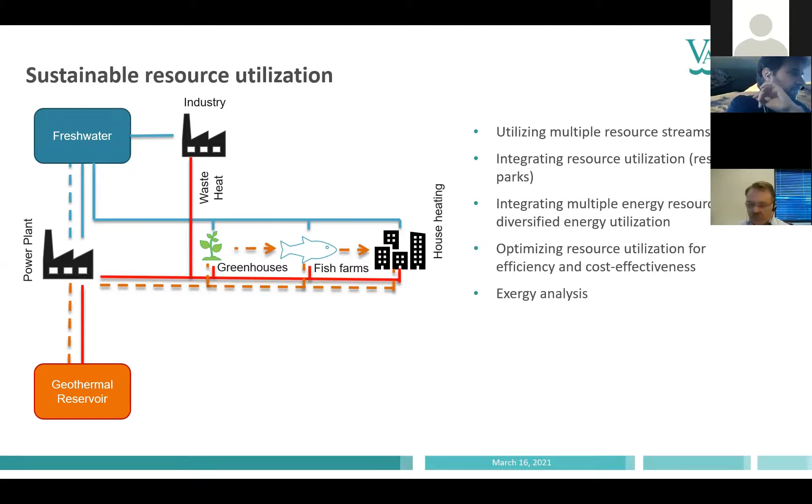Now, variable energy resources may potentially be added to these systems in the future. This includes gas, such as methane, that is captured in landfill or produced in, for example, biogas and composting plants. Vatnaskil provides multi-phase modeling services for optimizing such gas capture, as well as the gas transport to consumers. Such modeling is a comparable approach for our general assessment of greenhouse gas emissions, for example, for assessing the effectiveness of wetland reclamation efforts.

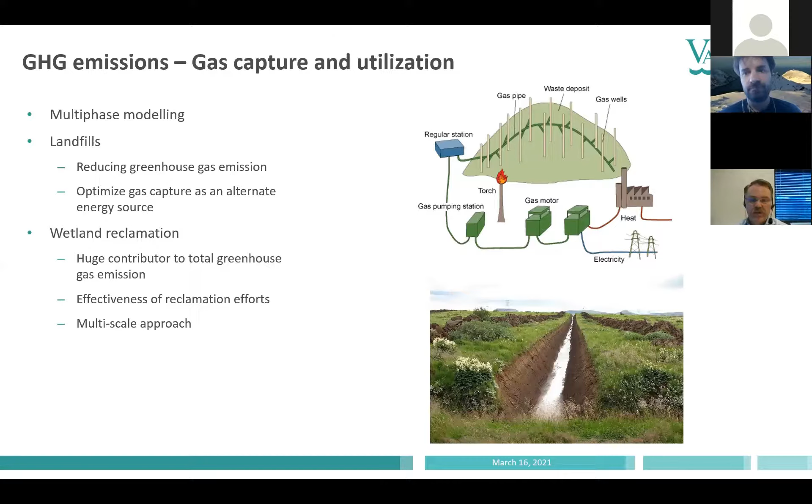For particularly convoluted problems in our renewable energy services, we have the option of providing high-resolution computational fluid dynamic analysis. Such analysis have proven to be instrumental for various applications, particularly where we may be dealing with complex multi-phase flow and heat transfer.

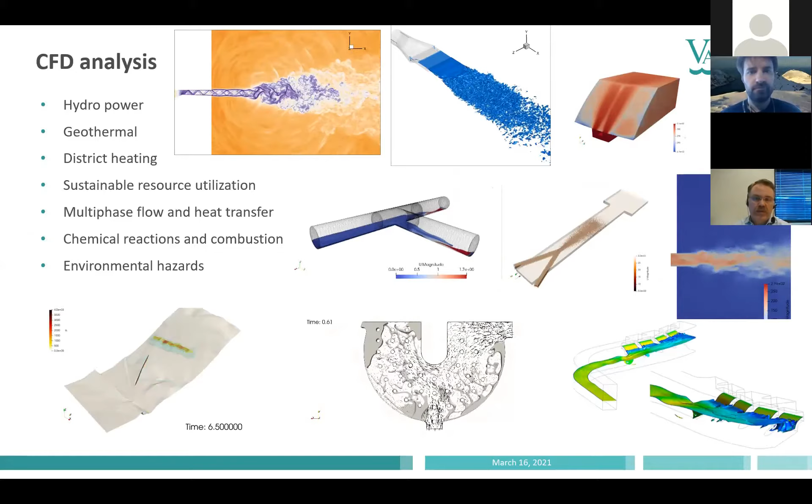Now, this brief overview on Vatnaskil's renewable energy services hopefully gives you some good idea on some of our modeling efforts to support sustainable development and utilization of energy resources. We have some additional information that can be obtained at our website, so take a look there, please. Well, thank you very much.

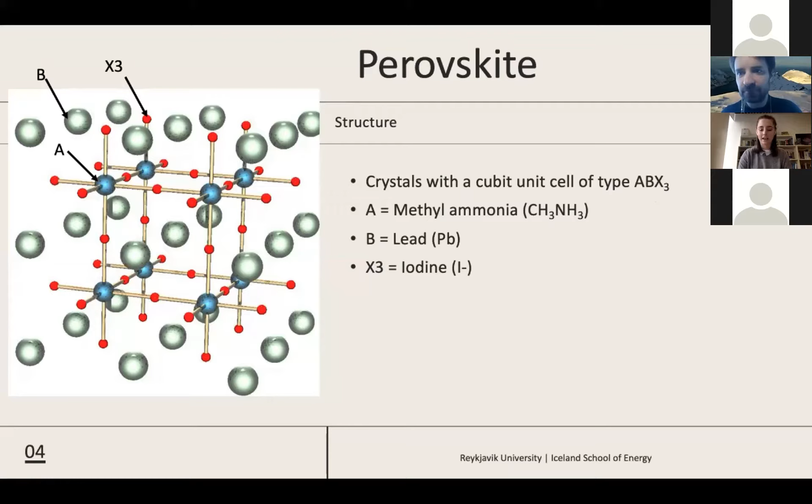Okay, so how exactly does this work? Well, it's very simple to those three attributes I talked about earlier. So a photon is going to kick an electron out of orbit, leaving a hole in its place. An electric field is created by the dipoles, which push the electron and the hole in opposite directions so they don't recombine, i.e. we actually get work done. This creates an electric current through an external circuit. So again, we're able to plug this in and we can just get energy this way, very similar to a varying amount of other photovoltaics.

Now, the benefits of using a perovskite is that it is cheaper than regular silicon and other types of photovoltaics, and it also creates the current in its native material for free. That means there is no need for any other doping mechanisms or any junctions or anything. This molecule is able to create energy on its own.

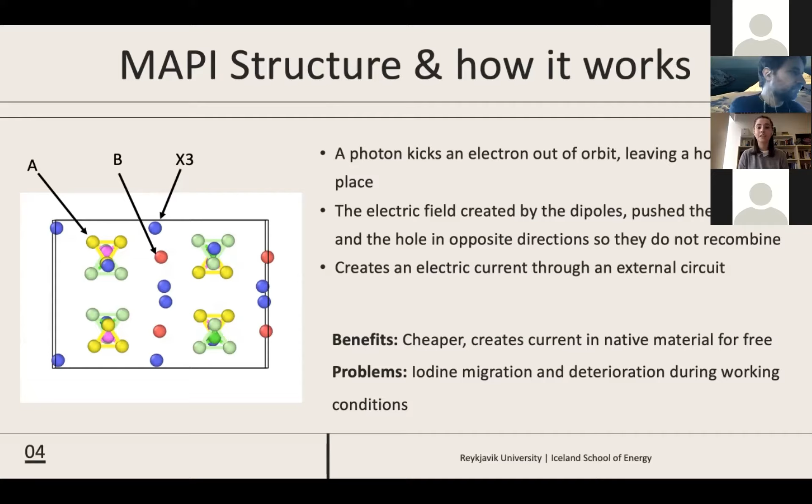Some problems with this, which I'll go into a little more detail, is the iodine migration and deterioration during working conditions. We're going to see a couple examples of this migration.

All right, so next is the objective of my project. We want to develop a physical model for the iodine migration using computer simulations. And then once we understand this migration, we want to try to propose solutions to prevent or reduce this iodine migration.

For the methodology, all of the research is being done using the LAMMPS software, which solves the equation of motion for each atom in small time steps. LAMMPS software is used by Sandia Labs, located in Albuquerque, NM. We also use a software called OVITO, which we take the output files from LAMMPS, put it in OVITO, and it helps us create an animation so we can see what happens in real time.